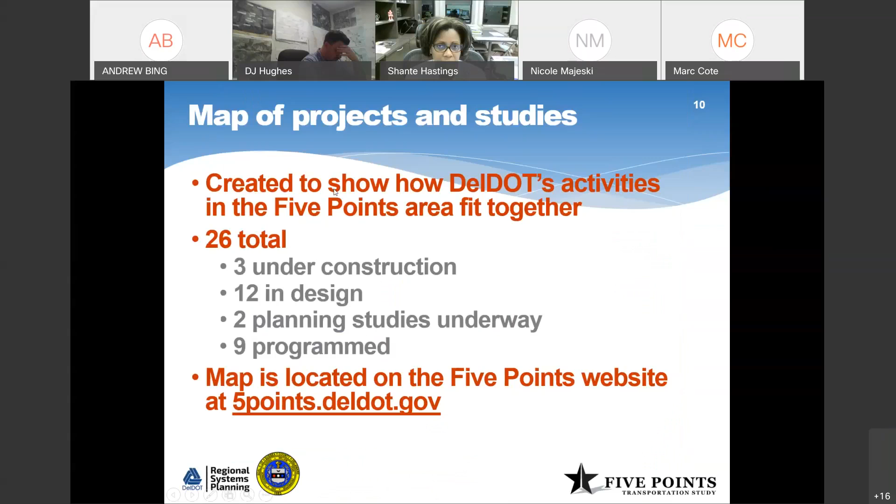We have some interim crossover improvements at SR1 and Cave Neck. That's to basically lengthen the left turn lane on northbound Route 1 and to make some additional adjustments, as well as adding some additional lighting. And that should begin construction early in 2021. We have some crossover improvements at SR1 Nassau Road and Janice, as well as SR1 Tulip Drive and Slipper Shell Way. Those will begin design shortly, and we will see what the construction schedule is. It will likely be either next year or the following year.

We've got sidewalks on Savannah Road that are in design, and we expect to go to construction in 2021 for them. We've got a shared use path along Monchy Branch Road. It's also in design, expected to start in 2021. Moving on to the planning studies. We have the Mulberry Knoll Road Extension Study, which has just recently gotten underway, and Jeff is going to give a more detailed update right after I'm done with the project updates. We also have the SR1 Low Stress Bikeways Study, and that is also underway and should be wrapped up in probably a year or so.

And then we have a significant amount of planned programmed projects. So they're in the CTP to begin design, but they're not underway yet. And that would be the Kings Highway project from Dartmouth Drive to Freeman Highway. And it is related and directly tied to the master plan for Kings Highway.

Design is expected to start next fiscal year, so basically July of 2021. We've got a widening project on US 9 from Ward Avenue to Old Vine Road, expected to also start design next summer. US 9 and Minos Conaway intersection improvements, programmed to begin design in fiscal year 24. Although this intersection is being looked at as part of the Minos Conaway grade separation project, because we know that there will be some impacts as we're building that project. And so we are looking at any temporary improvements that we may need to make as a result of that.

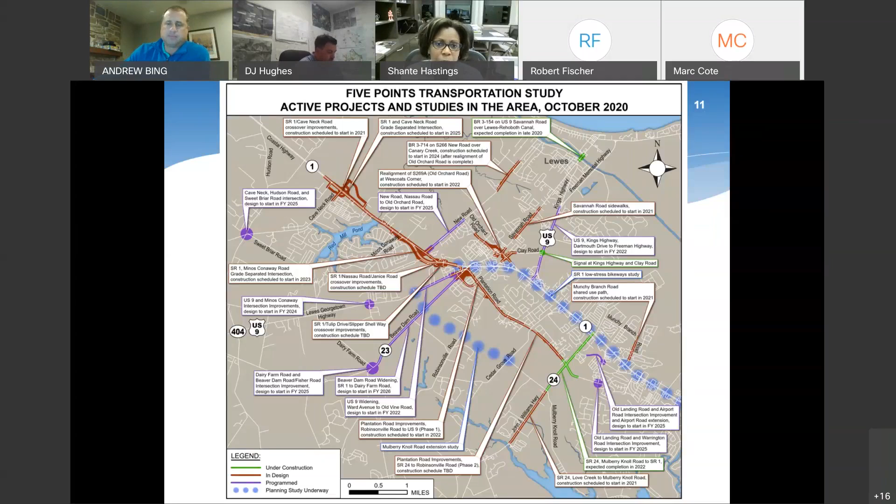And I don't know if John Fiore is in or somebody from the DBC, but that would be very helpful, I think, to them, because I've been bragging about what the 5 Points Working Group has been doing to the DBC for several of their meetings. So, you see what I'm saying with that? Go ahead. Certainly, I think that's a great idea. I think planning already has a great map of the existing trails and future trails that we can make sure to add some of the studies that are shown here. And then we could probably take this map, Bob, and maybe put a bike symbol next to the projects that are doing off-road shared use paths.

Yeah, and that would meet the needs. And DelDOT really deserves a lot of credit for all of the bike path improvements that you've been putting in place. I think bicyclists love you for sure. Thanks, Bob. I was just going to add that, with our Complete Streets initiative, virtually every project on this map will have some sort of bike pedestrian component and improvements with it. But we can highlight the major trail projects to help reinforce that.

Who knows, in the summertime when no traffic is moving, you might have people saying, I'm not going out except by bicycle. And so that's going to be the most important roadmap that they have with the bike paths. Thanks, Marc. Okay, Bob, why don't you go on mute and I'm going to bring DJ on.

Hi, I just want to make one comment before a couple questions, but lengthening the left turn lane on Route 1 at Cave Neck Road is a significant needed improvement. So thank you guys for moving forward with that next year.

Also, Savannah Road, at one point, there was a two-way left turn lane study that was presented to the group. And now I see you're moving forward with the sidewalks construction. Is that to say that a decision's been made that the two-way left turn lane will not be constructed on Savannah Road, or is that still in the process of being evaluated? Either Marc or Jeff Riegner, can you come off mute? I feel like they were in slightly different locations, DJ, but I could be wrong. I can chime in on that, Shante.

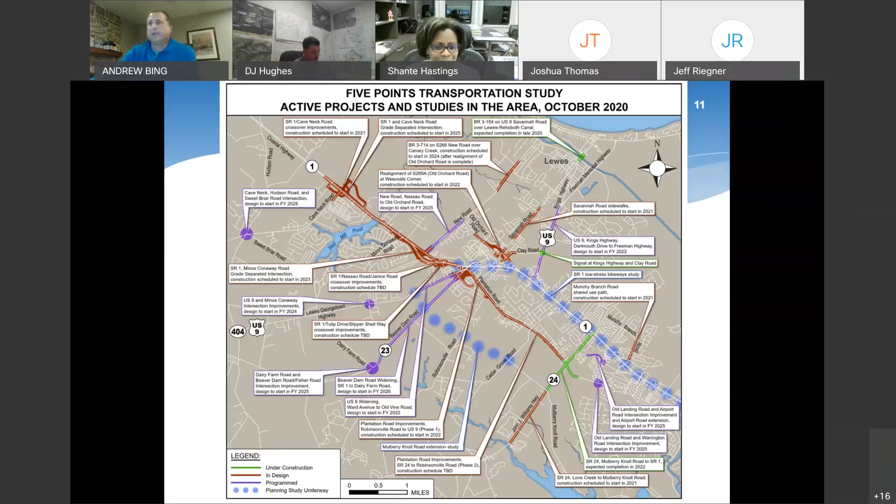And if you ever have any questions, even though certainly these meetings are a great time to ask questions, you can always follow up with us in between meetings. So with that, I'm going to move us along as I don't see any other hands raised for questions. Again, thank you, Shante, for all that information. And now we're going to go to Jeff Riegner. Jeff, if you could come on to give us a quick update on one of the projects that Shante mentioned, the Mulberry Knoll Road extension study.

Thanks, Andrew. Just as a reminder, the extension of Mulberry Knoll Road north to US 9 was a recommendation of two different studies. It was a recommendation of many of you as part of phase 1 of the 5 Points transportation study. It was also recommended as part of the Henlopen TID study that Mark mentioned earlier. So we are just getting started with this study. We started, I guess it was early September. So the work is going to include consideration of a couple things.

Shante mentioned that Plantation Road is directly parallel to this potential extension of Mulberry Knoll Road. So we want to make sure we understand how to get the best bang for the buck in making investments in this area. So that could consist of extending Mulberry Knoll Road. It could consist of widening Plantation Road in that south section, phase 2, between Robinsonville and Route 24, or it could require both. So our study will answer that question, as well as help us determine where the alignment of Mulberry Knoll Road should go, if in fact that's part of the solution.

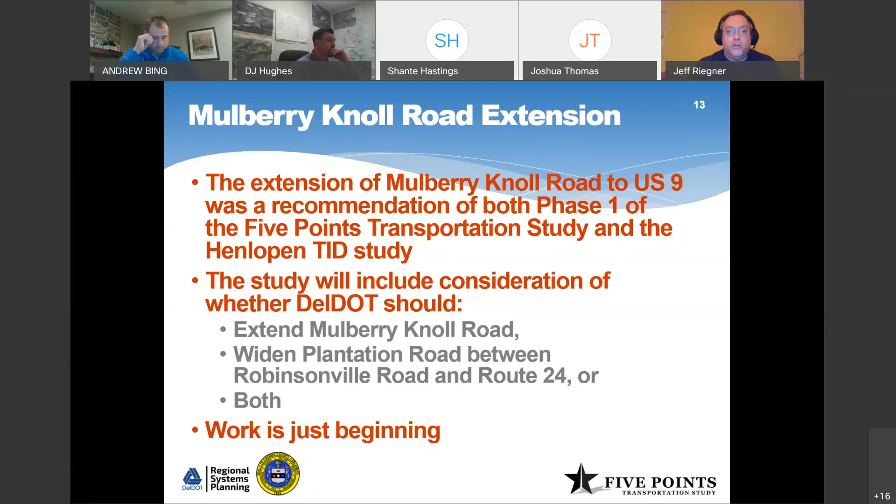So we've just started now with an inventory and mapping of what's out there. So DelDOT, through consideration of the National Environmental Policy Act, requires that we look at all natural resources like wetlands and streams, as well as cultural resources like historic properties in the area of any potential improvements.

And I just want to assure you, just because we're getting started now, we haven't yet had specific public meetings for this project, but public involvement will absolutely be a critical element of this study as it moves forward. So please keep your eyes open for that. And we will let all of you, both as the 5 Points Working Group, as well as all of the members of the public who receive regular 5 Points email updates, know when those meetings are going to occur.

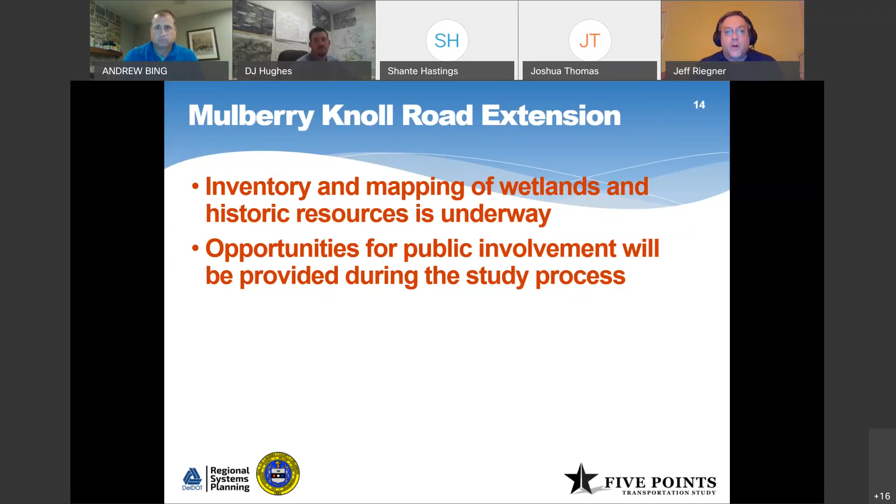So just to show you where the area is that we're talking about, you will see on your lower right, and I believe you can probably see my pointer, that's existing Mulberry Knoll Road. So the intersection with Route 24 is just below the edge of the map here. Mulberry Knoll Road now ends at Cedar Grove Road at what we'll call its north end, its northwest end. And the TID study recommended considering an alternative that would extend Mulberry Knoll Road north to Route 9 in the vicinity of the signal at the vineyards. So that would cross Robinsonville Road and it would cross Beaver Dam Road on its way up to Route 9.

So that area is pretty tightly constrained. There are existing developed areas that we will avoid. Jimtown is one of them, existing developments on either side. And we will look carefully at crossings of streams and wetland areas, as well as historic properties that will be identified to determine where that alignment is going to be.

Now, the TID, if it is approved, in fact, if the agreement is signed, determined that developers may be contributing to all or part of this project. So the point of this effort is to determine where the alignment generally should go. And that way, either DelDOT or developers or a combination of the two can move forward with it.

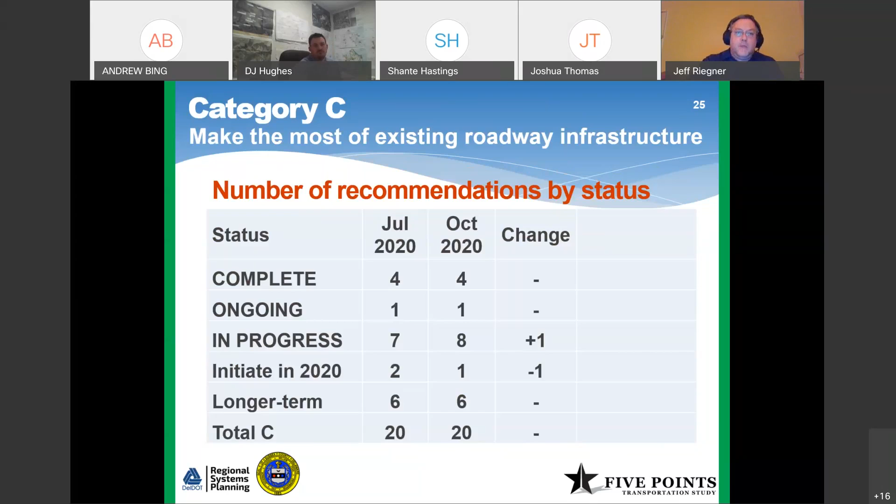And that's it for category B. In category C, which is making the most of our existing roadway infrastructure, we do have one recommendation that has moved from our Initiate in 2020 list to being in progress, as well as some other updates. So category C, C1 is the corridor study on Route 9. Shante already mentioned this, that project's programmed in the CTP and design is scheduled to start next fiscal year.

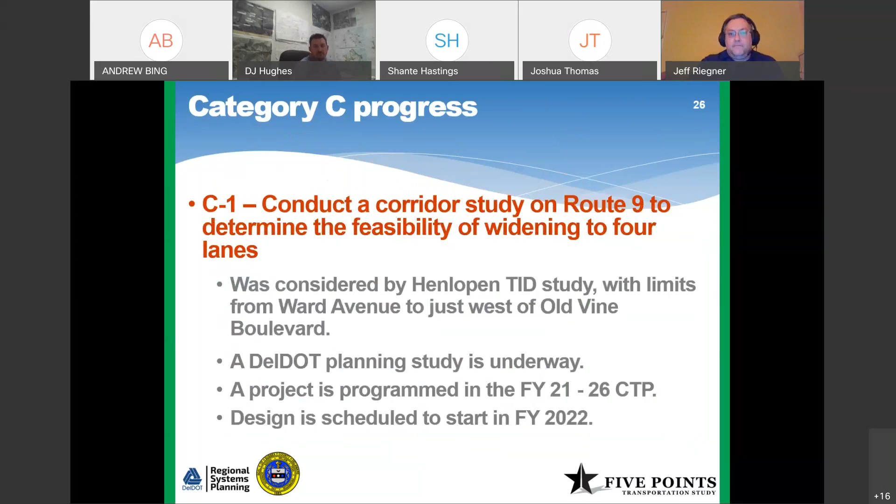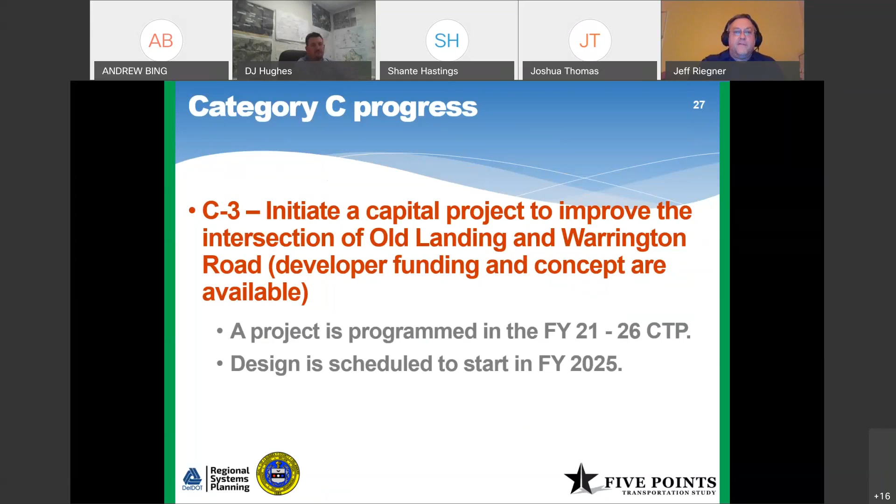Another one of Shante's items is C3, which is the intersection of Old Landing and Warrington Roads. Design at that intersection is scheduled to start in that popular year she mentioned several times of 2025. And I'd like her to actually chime in on this item too. This is C5, the intersection of Cave Neck, Sweet Briar, and Hudson Roads. Design is currently scheduled to start in FY25, but there may be the potential to accelerate that project. And Shante, could you speak a little bit about that, please?

Sure can. So on October the 6th at the Sussex County Council meeting, the County Administrator Todd Lawson introduced an idea, a program, if you will, called FAST, Funding Accelerating Safety in Transportation. And it would be the county's way of potentially accelerating projects that are already listed in the CTP in what we like to call the out years. So the last 4, 5, 6 years of the CTP, trying to accelerate some of those projects that have a huge safety benefit, especially those that are under pressure because of upcoming developments.

And so if council approves this program, this specific intersection was mentioned as a potential candidate to basically receive that funding. And the way the funding would work is that the county would provide DelDOT with the design, right-of-way and construction funding, and then we would reimburse the county, if you will, when the project is actually slated for funding in the CTP. So it's a way to bring the project forward 4 or 5 years, and then have us replenish that funding when it's available in our CTP. So we're hopeful that this program gets approved so that we can accelerate important safety improvements in the area.

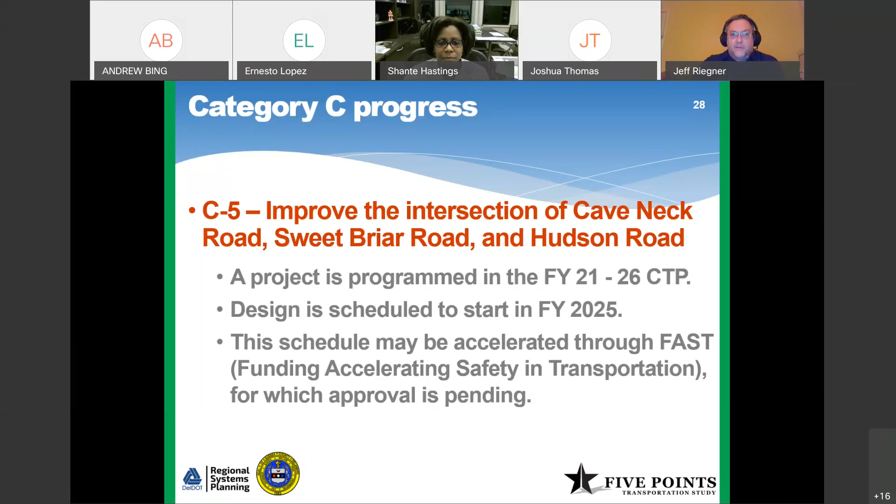Our next project is now in progress thanks to your input, and that is studying the feasibility of lengthening left and right turn lanes. You gave us suggestions back in January. DelDOT Traffic is moving forward with evaluation of those, including such data collection as they've been able to do, with the pandemic affecting that a bit, as well as field observations and such. So we look forward to sharing our progress with you as this moves forward.

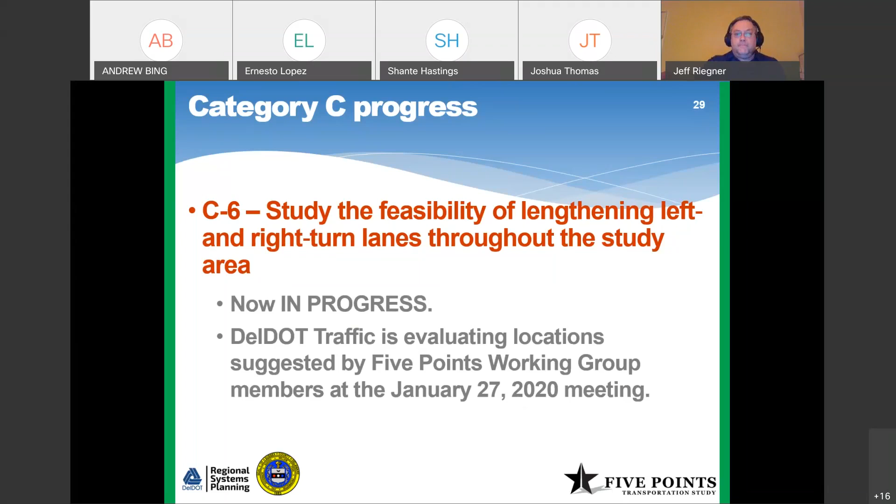Another recommendation is C19, which was study the feasibility of an all-way stop at Beaver Dam and Kendale Roads. This, as we mentioned previously, was considered by the Henlopen TID study. The key element here is the curve at this location. So whether this becomes a traffic signal or some other type of traffic control or geometric improvement is going to depend on making sure that that curve can be negotiated safely and that sight distance to a signal or other traffic control device would be retained. So this is something that DelDOT Traffic is considering actively to determine what is the appropriate thing to do at this location.

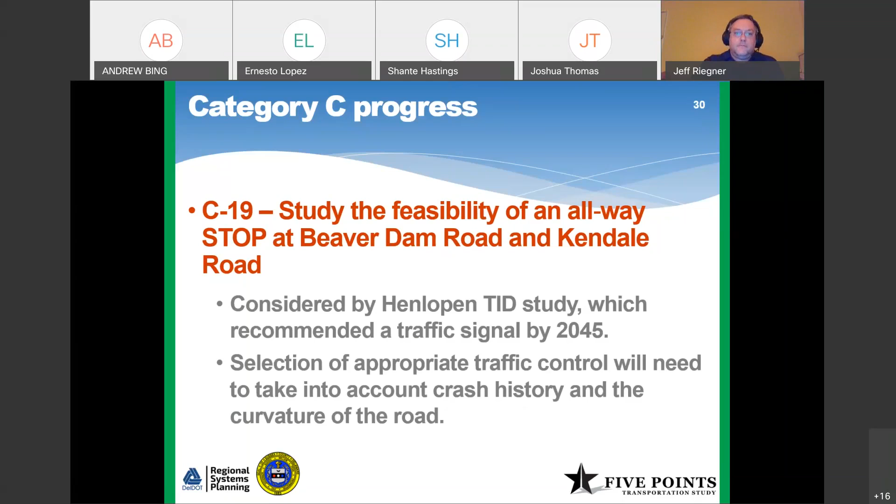DelDOT is still working on recommendation C20, which is replacing the HAWK signal at SR1 and Holland Glade Road with a full signal, potentially with a fourth leg at the outlets. DelDOT's continuing to work with the developer. Planning's development coordination section is reviewing the plans and providing comments. And it's our hope to be able to reach a conclusion relatively shortly that we can share with all of you.

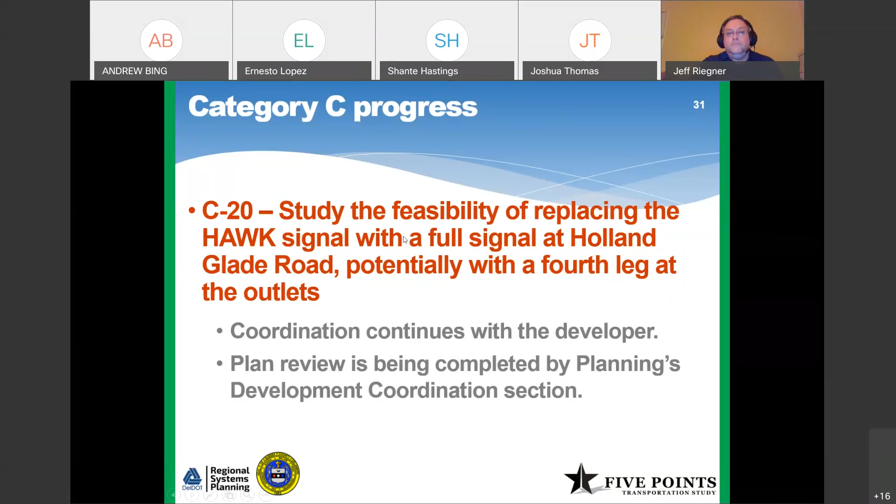So there's a lot to cover, of course, as always in this section. So Andrew, if you see any hands raised and there are any questions, happy to answer those at this point. Yeah, I'm not seeing anything, Jeff. So if someone does have a question, either raise your hand or again, this would be a good time just to come off mute and engage. So I don't see anything, Jeff. So why don't you keep going? I'll soldier on. All right.

So category D is walking, bicycling, and transit. We do have a project that's moved to complete. And that is studying the feasibility of signing and pavement markings for bicyclists turning left from Dartmouth Drive onto Route 1. This was a bike box that was under consideration, and I don't remember exactly which meeting. It might have been the January 2020 meeting, where we talked about the potential for doing that. In further consultation and technical analysis, we determined that a bike box isn't feasible here.

Bicyclists can today cross Route 1 with pedestrian signals. And when the Kings Highway CTP project moves forward, that does include this piece of Dartmouth Drive to Route 1, and further improvements could be considered at that point. So the feasibility study is complete. We determined that additional work is not feasible at this point, and we'll roll that into the Kings Highway project as it moves forward.

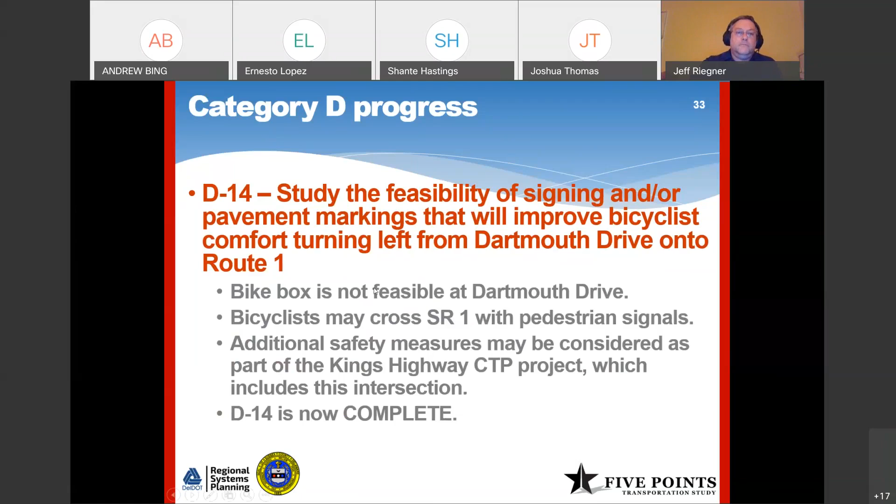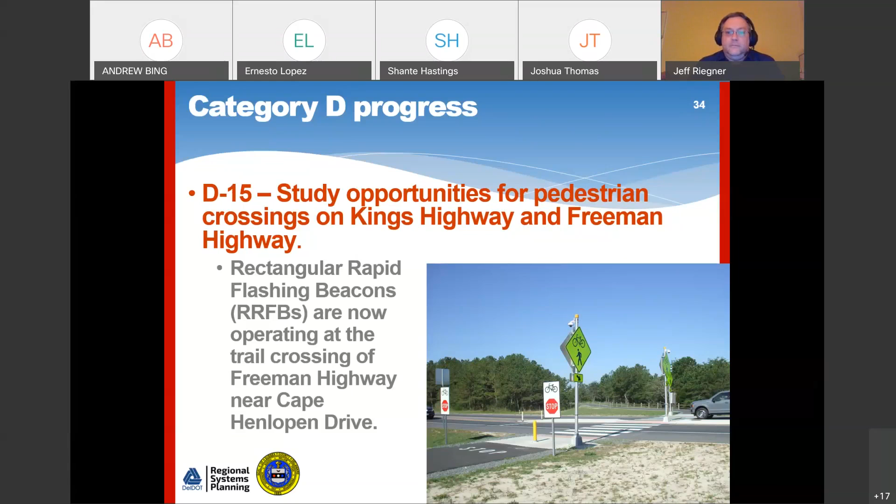D15, the next recommendation was looking for better opportunities for pedestrian crossings on Kings Highway and Freeman Highway. As most of you know, Freeman Highway is a facility of the Delaware River and Bay Authority, not of DelDOT, but there's been significant discussion between DRBA and DelDOT, and a couple project team members noted that the rectangular rapid flashing beacons that are in this photo are now operating where the trail crosses Freeman Highway just south of its intersection with Cape Henlopen Drive. If anyone could chime in and let us know, yes, you've seen it, we greatly appreciate that. Okay.

So that's category D, and then category E is our big one. This is the new infrastructure projects, the big new roadway connections, interchanges, things like that. And our update here is about Mulberry Knoll Road, which we just described. So I won't go into that in any more detail, but that planning study is currently underway.

Yeah, Jeff, you zipped right through D without asking if there are any questions. Hi, Bob. Go right ahead. Can I be brief? Please. You know, we had a very serious study and large amounts of public comment on the future of the rail trail that's now the Georgetown to Lewes walking and bike trail. And we voted, not unanimously, but pretty strongly, that it would remain a bike trail.

Does this group believe that that is like a Supreme Court precedent? I mean, never say never, but it's unlikely that DelDOT, having invested quite a bit of money in that, would then say, our bad, we're going to make that a 4-lane highway between Georgetown and Lewes. And I'm actually trying to save future people a lot of time continuing to look at that if there is a position on it now. If there's no position, then they'll have to look at that in the future. But I'm just asking that question.

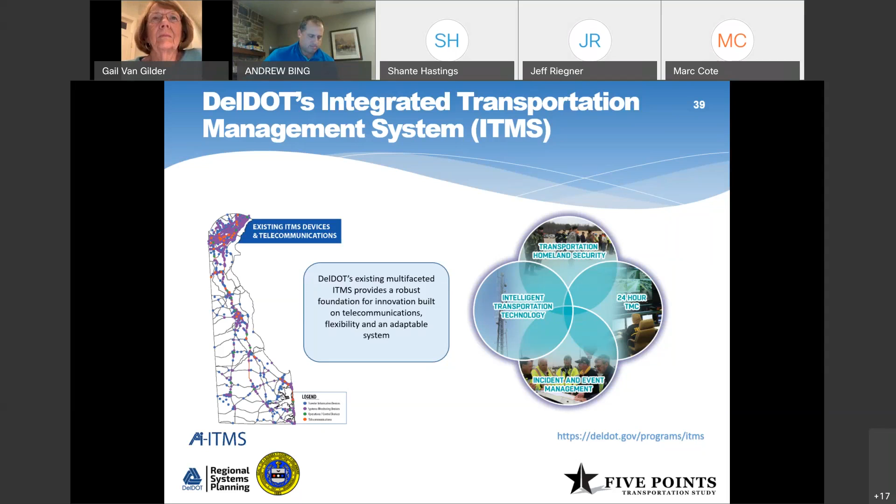So what I'll be speaking about tonight is our integrated transportation management system, our transportation management program, just real quickly, and then to talk more about traffic signals. Next slide, please. We have a very innovative transportation management system, but I try to simplify it, that we do three functions: control, monitoring, and information. If you've used our app and so forth, we've built a very extensive monitoring system throughout the state, including cameras, detection, and a variety of other things, even monitoring flooding.

This is an integrated system. It's integrated with transit and highway operations. You all are familiar, I hope, with the DelDOT app and the DelDOT website, so you can see most of the things I'll be talking about. Over the last 20 years, we've been building a robust fiber and wireless network. It takes a lot of telecommunications to support this system. And at the core of it all is the statewide computerized signal system, which I'll talk more about. Next slide, please.

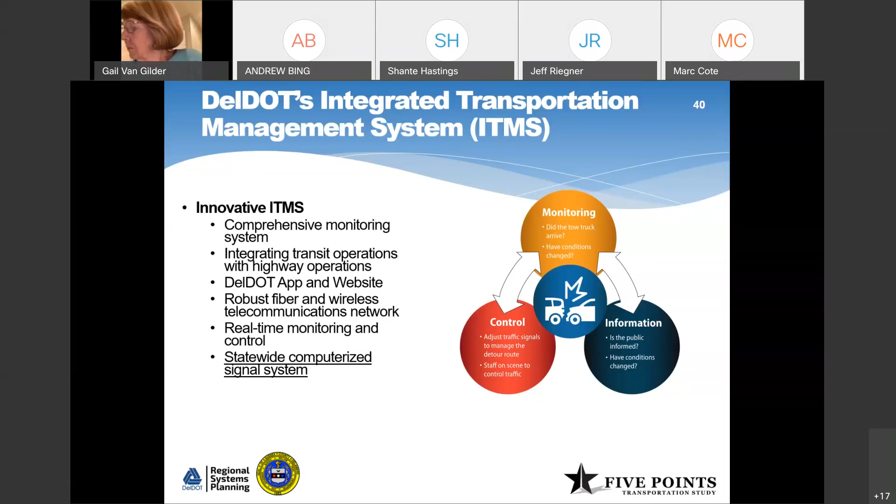In 2017, we updated the 1997 integrated transportation management strategic plan. And it says keep doing what we've been doing, but also start to look at connected and automated vehicles, and, which I'll talk about some tonight, using artificial intelligence to improve how our systems operate. Next slide, please.

When I first came to DelDOT 23 years ago, I looked at how transportation management was being done and looked at all the planning, which is excellent, but I needed it at a level that is more operations oriented. So we started creating what we call the Transportation Operations Management Plan, and we have one for each of the three counties. The Sussex County plan, you can find it at that web address there, was updated in 2017. We work closely with planning, and we've agreed that these plans should be done on a more frequent basis. So we'll update one plan each year, so basically every 3 years you'll have a new plan. Next slide, please.

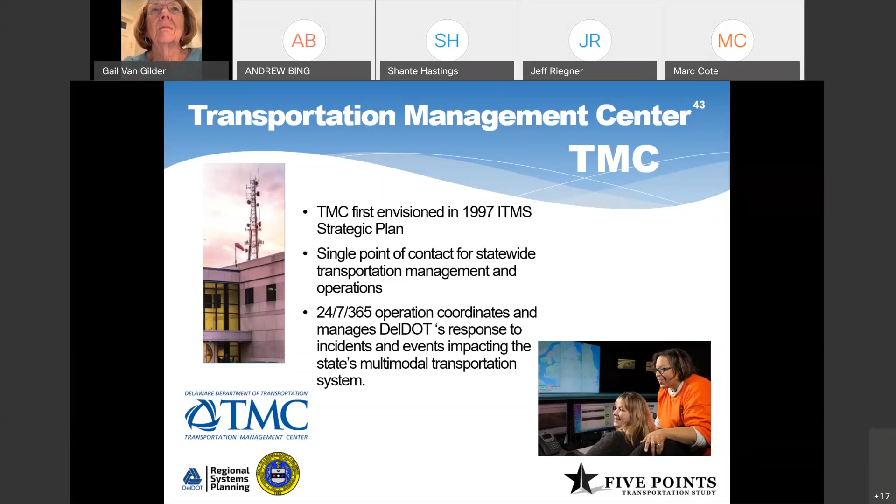At the core and the heart, and where I'm sitting, I was going to do my presentation showing the TMC room, which is right out my window, but it was so noisy in the room that you wouldn't have been able to hear me. So when COVID goes away and we're more settled in, we invite any of you to come visit the TMC. It is a single point of contact for statewide transportation management and operations. We're open 24 hours a day, 7 days a week, and even through COVID, knock on wood, we've been continuously operating. Next slide.

Travel times was mentioned earlier, and we have a variety of ways. We have built a Bluetooth and Wi-Fi system that gives us excellent travel time. We've been testing it, and we're within 1 minute of Google. And so we continue to expand that Bluetooth travel time system.

We also have sensors. We work with Maryland, and we put sensors over on Route 50 and 404 coming to Delaware. And so you can actually get travel times from the Bay Bridge to wherever you're going. This helps for planning purposes and real-time operations. We have travel times on the DelDOT app and our DelDOT web, or what we call the DelDOT Interactive Map.

Electronic message signs were just talked about. We are enhancing the sign control system to allow us to put travel times on any one of our variable message signs. We did have 2 signs that were operational and testing, as we said, this summer. And also, if you go on our website or on the app, you'll see an electronic version of that. And it's operating real time right now.

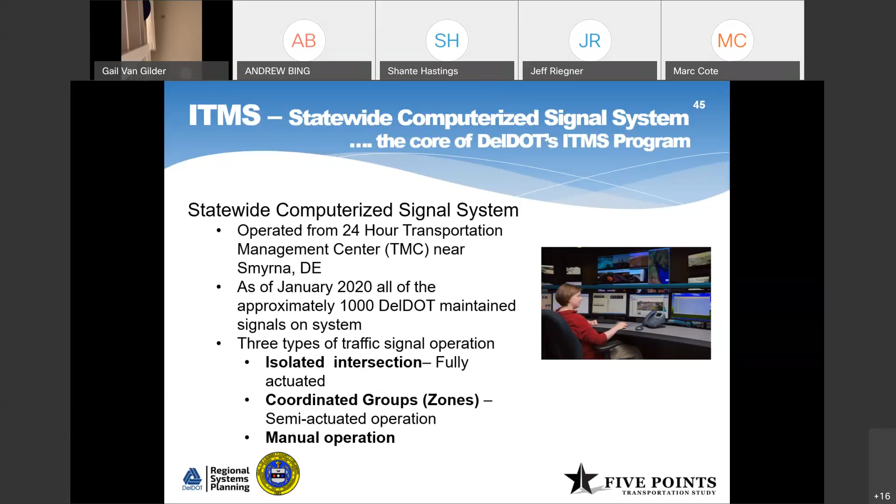So in the coordinated zones, every traffic signal in a coordinated system is operating a cycle length, which I'll get into a little more in traffic responsive. Offset is the relationship between the signals. That's the coordination part. So say there's intersection A and B, and it's 10 seconds between them at travel speed. So the offset, we try to make 10 seconds.

The cycle length is divided into splits. So each of the phased movements gets a percentage of the cycle length. And inside of that split is the green time, the yellow time, and the all red time. And then we have time of day operations. That's where we have certain corridors where we haven't got all the system detectors, which I'll talk about next, operational. So we're running those corridors like in the old days by time of day. So at rush hour, from 6 in the morning until 9, it's running a rush hour pattern and so on.

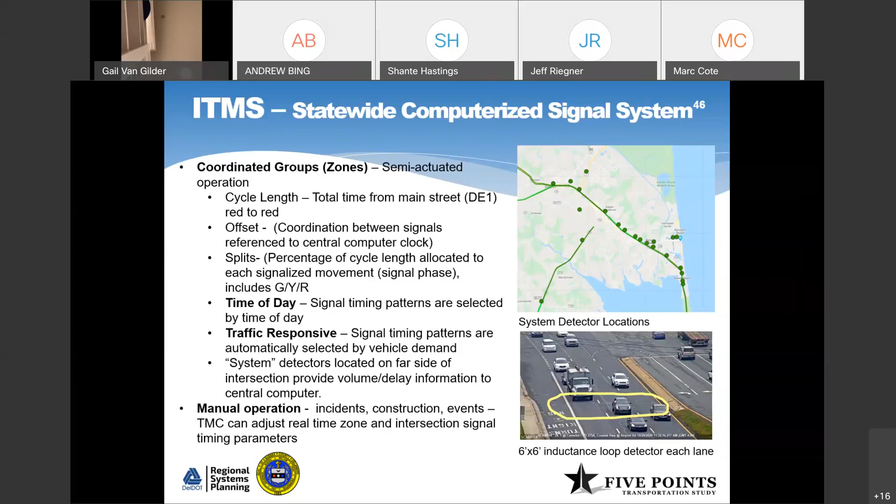And so in the Lewes, Rehoboth, Dewey Beach areas, we've divided that up into 2 zones. So from 5 Points to Bay Vista Road is Zone 20, and it's running traffic responsive. Its cycle lengths are 90, 120, 150, 165. And we operate inbound, which is southbound, balanced, and outbound, which is northbound.

In Dewey, it's Zone 19. It's from Spring Lake Drive through Collins Street. It's operating the same cycle lengths. In fact, this summer, you remember there was a lot of construction going on in Dewey. We lost a lot of detectors. So this system is really beneficial in that we just moved all those intersections to Zone 20.

And so it was using the system detectors along the corridor for Zone 20, which would be similar traffic that's in Dewey. So that's one of the powers of having a central control system. We can adjust most anything. And so next slide, please.

All right, signal operation timing impacts. I'm putting a list of things which we'll probably get questions about and so forth. Demand versus capacity is our business. One thing I say to people is we all want to leave our subdivision and go up to the signal at the end of our street and have it change right away for us. And then when we turn out on the arterial or the main road, we want all of those signals to be green for us, and the heck with everybody else coming out.

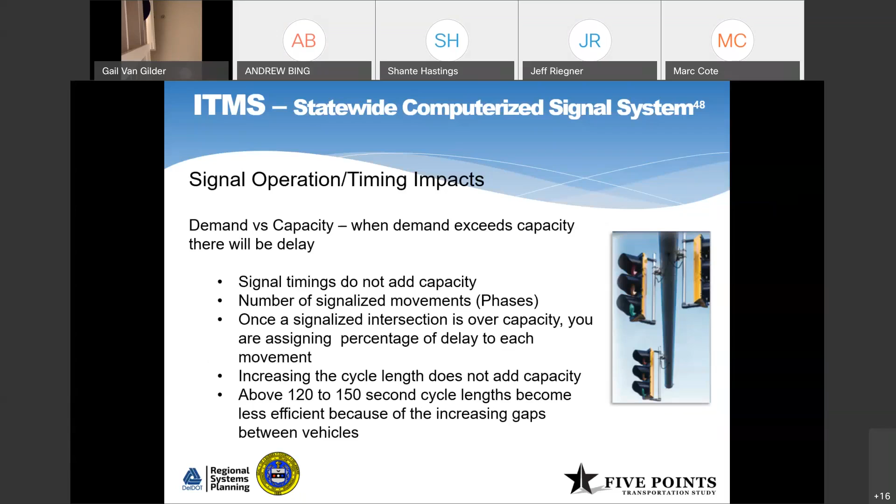Other signal timing impacts, pedestrian signal timing. And this is the part I want people to understand. An example is, for us to cross a roadway like Route 1 in the area we're talking about, that's about 120 feet wide. And so for a pedestrian to cross that, we have to allow 7 seconds of walk to get them going. And then from curb to curb, it's about 40 seconds plus a yellow and red clearance in there.

So about 47 seconds. The amount of cars using the side street, in this example, Camelot, is probably 4, 5, 6 cars lined up. And so 6 cars is probably about 20 seconds. To do the peds is 47 seconds. So if you do what I refer to as vehicle equivalence, where you take that time of 47 seconds and turn it into vehicle equivalence, it's equivalent to about 20 vehicles per lane. Multiply that by the cycles, 150 seconds, that's 24 cycles. So that's 500 and some vehicles equivalent that we're timing for, but they're not there because of the ped timings.

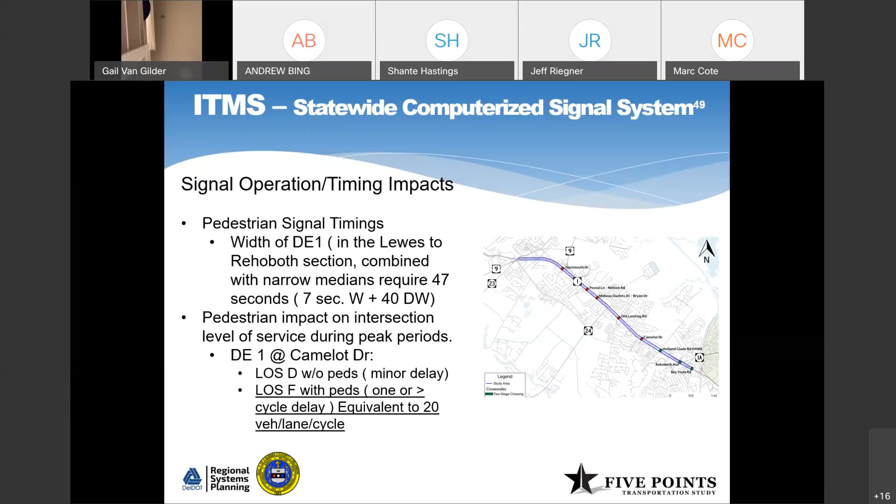The other thing is signal coordination. We get a lot of questions about why I get stopped and so forth. And so the things to watch, especially with actuated signals, is that, say at Camelot, where I said if the peds don't push the button and there's only a few cars on the side street, you're going to get what we refer to as an early green. And so you're starting up earlier than the coordination would really want.

It looks prettier in big cities, DC and other places, even in Wilmington. Most of the signals in big cities are running fixed time, meaning every phase of a cycle is going to run the same time during that cycle, even if there's no cars or peds there. So it makes the coordination look what I call prettier.

The diagram on the right is what we refer to as the time-space diagram. And you can see it's forming an X. So when you leave one intersection, if the spacing is perfect, like you see me saying intersection spacing impacts coordination, then you could make it so that the angle is by speed between those points, and your goal would be to do this X and everybody gets a green. That's not really going to happen because of intersection spacing and a variety of other things.

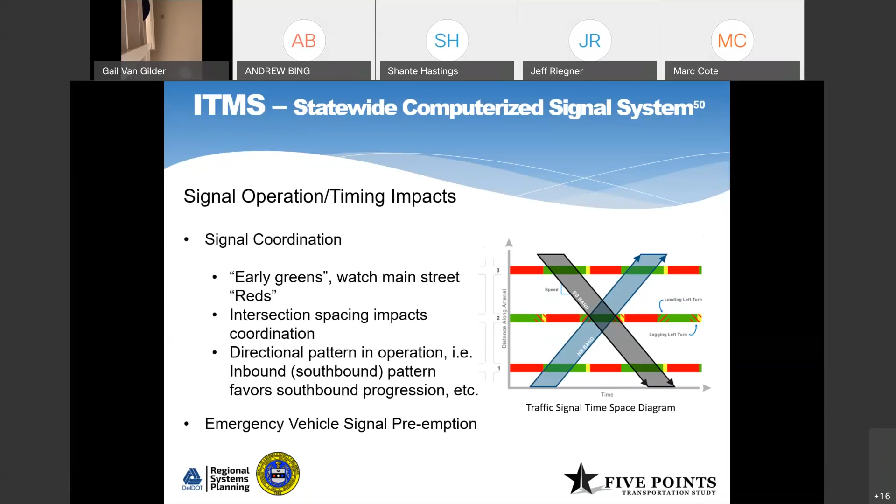So we're at AI ITMS; artificial intelligence is what we're applying. This is what I'm really interested in. This is the next big phase of how we operate the system. With artificial intelligence, machine learning, machine vision, and so forth, our goal is to build a truly predictive and adaptive transportation management system, where it's watching for problems, predicting ahead when you're going to have a problem, and adjusting traffic signals and other devices to be in front of that. And that work has begun.

It was part of a grant we competed for and won. And so it's a 3-year project. And so this system will monitor everything. And what I try to explain, we're talking to thousands of things, literally thousands of things out there on the system. There is no human being sitting in this TMC, myself or anybody, can keep up with all of that. So AI is really going to help our people to focus on the real problems.

When Federal Highway came to me about this, they said, well, it would advise the operator to do something. I said, I don't want that. We want to build it so it actually does something and still advises the operator. So this is the big next step. We can probably go to the next slide, please.

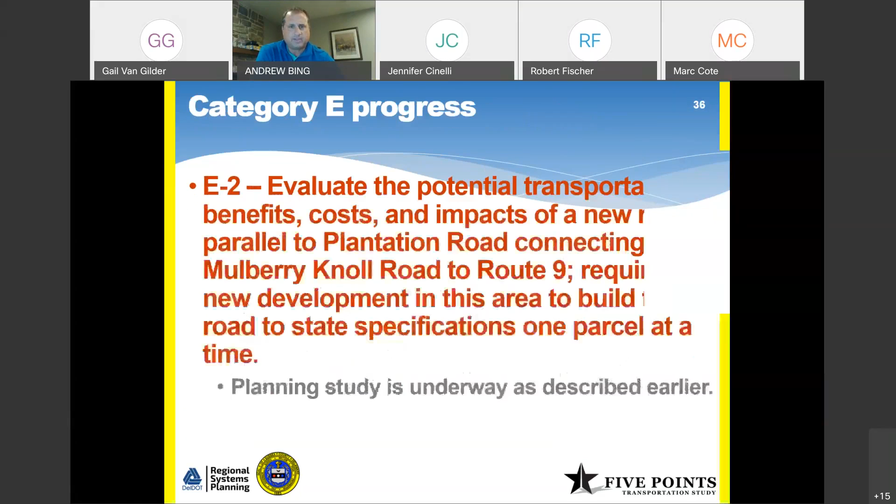Jeff, I'm going to look to you to scroll back up. So Mr. and Mrs. Cross, just give us a second. I think we're going to go back up to that part of the presentation, and then I'll have Jeff Riegner come on and respond. So Jen, I just want to be precise with the question. Can you read that again?

Sure. Is the pink route that was on the map for Mulberry Knoll the same as the yellow route for the Western Parkway? I was told it was not going to be used because it would come right through my property. We would lose our entire residence if so. Jeff, you may need to, in your response, I'm sure you're going to do this, but just to help people understand what they're referring to when they say the Western Parkway.

Sure. And I don't recall the exact year, but I'm guessing it was around 2007 or so. DelDOT undertook a study to look at a 4-lane roadway that would have gone west of and parallel to Plantation Road. I do not recall exactly what the yellow route was. There were a number of different options that were considered before that project did not proceed.

All I can say is the area that we're considering in the dashed pink oval, if you will, is fairly wide, and that is not going to be entirely impacted by the project. It would simply be the width of the roadway, and we haven't yet determined what that alignment is going to be. All I would encourage you to do is stay subscribed to the following 5 Points updates.

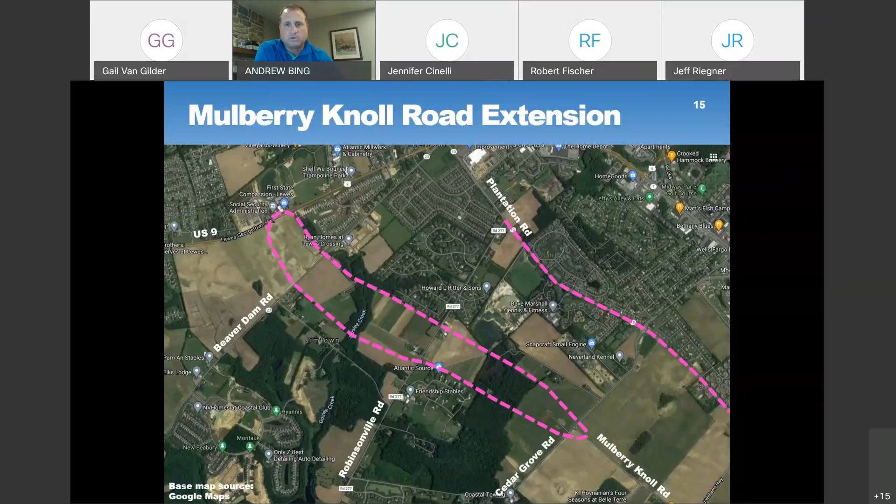Gene, are you still on by phone? Making sure we can still hear you. I'm on. Okay, so I don't know if you heard that, but what type of traffic signal operation is used at 5 Points? It's part of Zone 20. It's a critical intersection. It's semi-actuated. It's coordinated with the other signals in Zone 20.

So it's semi-actuated. On the side streets or Route 9, there's detectors in the left turns. Both on north and southbound, there's detectors. Those are the actuated movements. Delaware 1 is not actuated. Its overall time is controlled like the rest of them from the central computer. But that is the most efficient way to run it.

Okay, thanks, Gene. And there's a question from Teresa Baldwin. Will it be possible for a pedestrian to cross Route 1 from the Lewes Park and Ride, and what will that look like? So Andrew, I unmuted myself. We don't have a plan at this time to have a pedestrian crossing at the Park and Ride, but it is being looked at as part of a few different studies.

And I think Jen might be able to speak about it, I think there was a recommendation related to this. And so we are kicking off a study to figure out where best to cross peds and how to do that. Is it at some type of signalized intersection? Is it a pedestrian bridge? Or is it at an adjacent intersection where it may not be as convenient to get directly across? When you're balancing all of what Gene talked about with trying to have good travel times along Route 1, as well as balancing those peds, they may have to be pushed to a different intersection. Okay, great. Thank you, Shante.